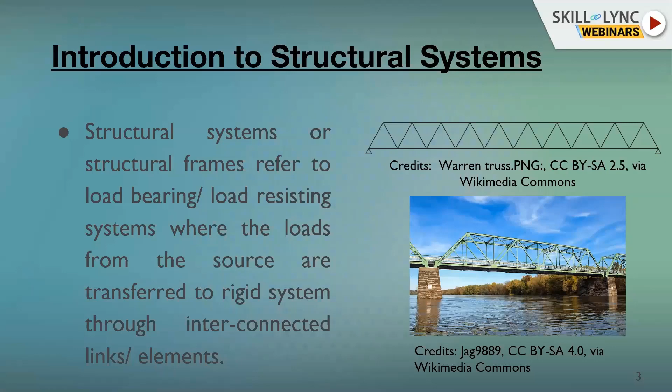Going further, we'll discuss the objectives of structural systems. The objective of the structural design and analysis is to produce a structure capable of resisting all applied loads without any failure during its intended life. The structure should be capable of transferring loads from one element to the other without failure.

Here, structure doesn't only mean bearing load. It can be any part that can transfer load from one part to another. For example, consider any gear—during reduction of torque or RPM, we use two gears. One gear has to transfer the torque to the other gear, so the load is being transferred from one gear to the other, and the gear should be structurally rigid enough to transfer that load.

Here, the teeth will undergo major bending and compression loads, so the gear should be designed such that the teeth are capable of taking the load.

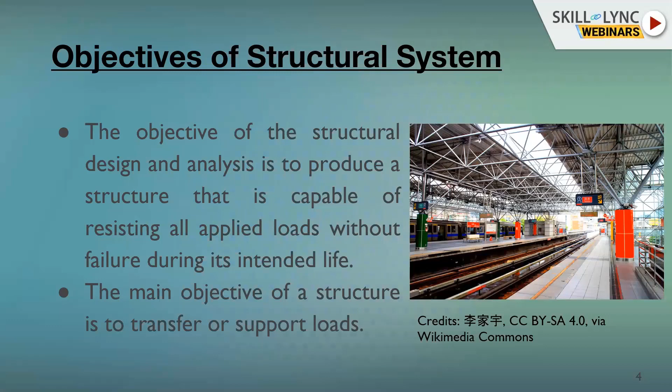Also, the weight of the system or weight of any structural system should be maintained as low as possible, unless any design constraints or requirements are to be met. This is to make sure that the structure is made at less cost and with less weight of material. Any structure can be made with solid parts. For example, as you see in the picture, many tubes are connected through interlinks and through triangular trusses.

So the system should be designed accordingly.

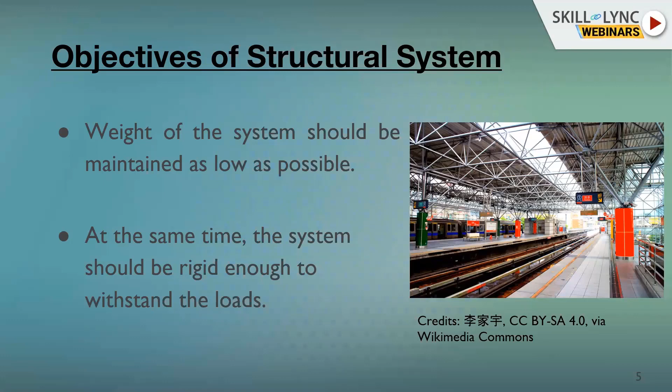Also, one more objective in structural systems is that the system should be designed with as few components as possible, to reduce any compliance. Compliance is the biggest issue which leads to the failure of any component. As you understand, if you need to transfer load or force from one component to another, and one component can transfer the load directly to the other without any linkage between them, the complete load can be transferred without any loss.

For example, if you see the steering system in the picture here, it's a direct steering system where the steering wheel is connected to the rack and pinion gear. But in the physical world this system can't be achieved because of space constraints or design constraints. If you wanted the same design in the vehicle, the wheelbase would increase very much, which would not be good in dynamic terms.

So unless it is required, we should always use as few components as possible, in order to avoid compliance. Compliance is not good for design, as compliance will always multiply and never just add up. So multiplication of any compliance will lead to failure of the product very soon.

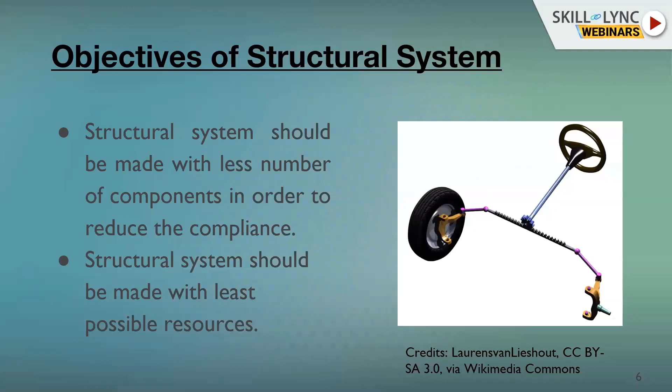Going further, here we shall discuss the applications of structural systems. These applications can be applied in very wide ranges across various fields, such as the construction sector, industrial sector, robotics, and medical sector. Not even a single sector is there without any structural element included in its design, because all parts made in the physical world should be designed to withstand the loads, so structures are involved in every sector.

If you consider any construction sector, majorly we see buildings which have a long life to withstand all the loads and weight applied on them. For example, almost all buildings are constructed with a design factor of safety of more than 5, to make sure that even during earthquakes or floods, the structures do not fall off.

If you consider bridges, it's the best example of how engineering has improved in this kind of structure. Now we can see suspension kind of bridges being used. Earlier they used to construct bridges by mounting pillars into the water, which made it very difficult to construct long bridges. As engineering improved, we now see a wide range of bridges using suspension mechanisms, so that only a few pillars are installed into the water, and much of the bridge is held by the suspension setup using ropes and strings.

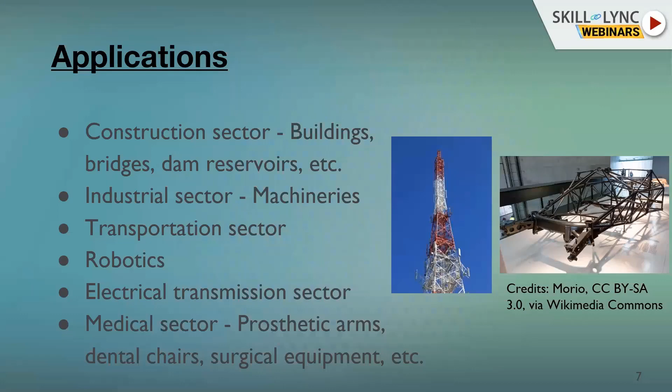Going further into the next slide - structural systems in the automotive sector. It is very necessary to understand the importance of structural systems in the automotive sector. As you know, vehicles are moving machines carrying much weight. They experience different loads which occur during the dynamic state of the vehicle. So the structures built in the vehicle must withstand various loads and should work till its intended or design lifetime.

The chassis is the main structural body of the vehicle which houses all the vehicle parts. All the loads which occur in dynamic conditions of the vehicle will be transferred to the chassis through various links, and the chassis will be designed rigid enough to withstand these loads. The chassis will undergo bending, compression, and torsion under various applications of loads. So the chassis design should be rigid enough, and simulations must be performed on it to make sure it can be manufactured in the physical world.

Similarly with the powertrain assembly, each and every component of the vehicle is a structural component. In the powertrain assembly, power has to be transmitted from the source where it is generated, like the cylinders. From the cylinder, the power has to be transmitted to the drivetrain through interlinks such as gears and drive shafts. All these drive shafts and gears should be designed rigid with proper design so that they can transfer torque from one component to the other.

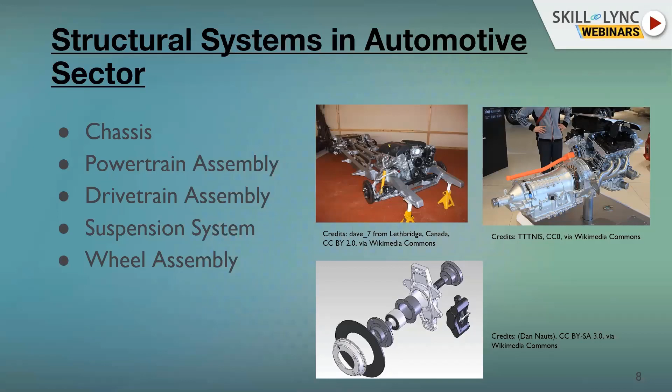Now I'll move on to the design approach which we generally use in industries in order to make sure the part functions as per the requirement. So first we need to understand the problem statement, the problem statement that we need to satisfy.

So for suppose I'll give you an example how this design approach is included in designing of any drive shaft. First we have to understand the functionality of the part. The drive shaft has to transfer the torque which is generated from the source to the drivetrain assembly or to the wheels. So here the main function of the part is to transfer the torque.

Then we have to analyze the load cases acting on the part. For suppose it's a drive shaft, we have to analyze where all the loads will be acting, at what ends, where the drive shaft will be mounted, and the mounting portions - everything we have to understand and analyze.

From then we have to form the design constraints or boundary constraints - nothing but we have to see the space, the design constraints. We have to perform mathematical calculations to calculate the diameter of the shaft that will be rigid enough to transfer the torque that is intended for. So we have to perform certain mathematical calculations before designing the part.